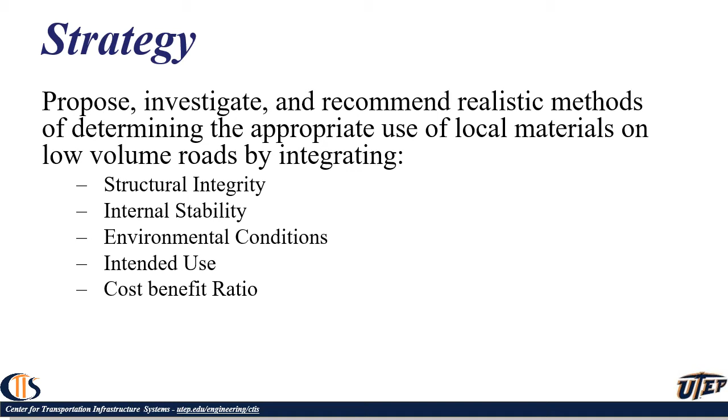The goals of the project were twofold. First, to delineate an out-of-spec material from a low-quality material. I would define these in a second. And if a material was considered out of specifications, we wanted to see whether, when, and how we can use it to still get a quality foundation.

And for the low quality materials, we just wanted to see if we can add a small amount of additives and turn it into a viable material, to behave like a high quality material.

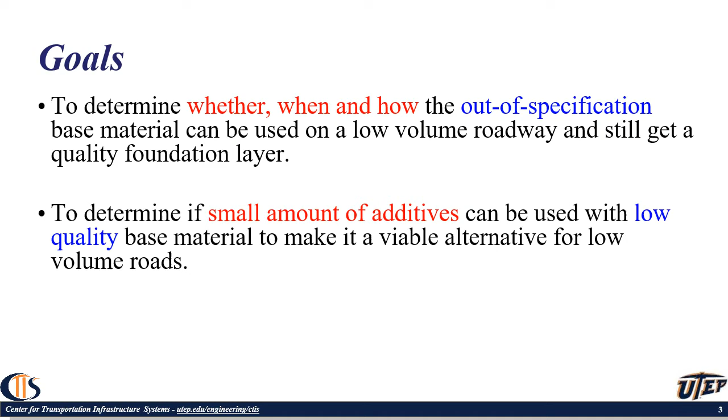Let me first define the difference between an out of specification material versus a low quality material. To do that, I'm showing you an example of a specification I extracted from Texas Department of Transportation, but this same type of specification is very common.

There are two components in this one. One, there are essentially the limits for some index properties given the gradation and plasticity, and the second part has to do with some engineering testing like the strength test, as you see over here.

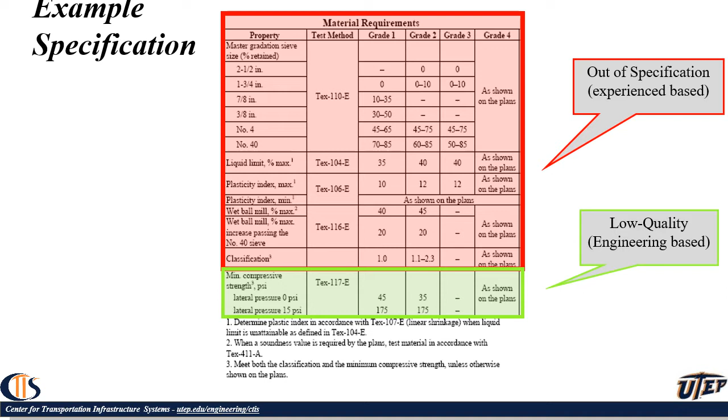What I refer to as out of specification are these index test results, where the limits are set based on consensus and experience, as opposed to the engineering values that were obtained from the parts shown in green.

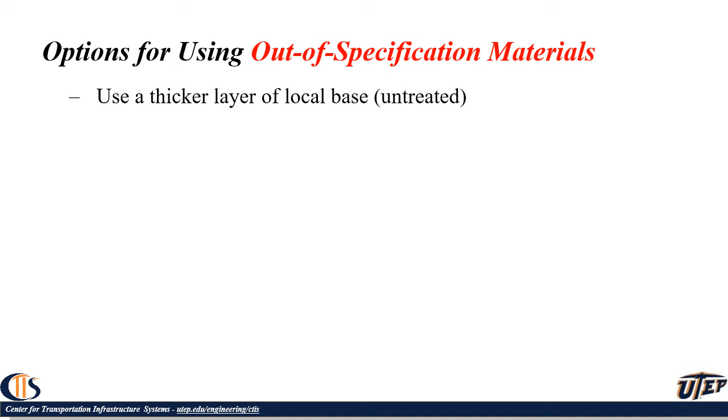The options we used for using out of specification materials are shown below. The first one was using a thicker layer of local base. The second one was to use the same thickness of the local base, but thicken the hot mix asphalt -- we eliminated that because of the cost.

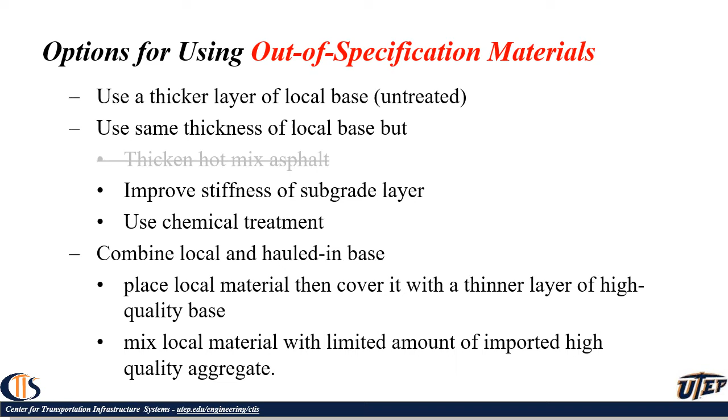Improve the stiffness of the subgrade or use chemical treatment. The other group of options was to combine local and hauled-in base. One was to place a local material, then cover it with a thinner layer of high quality base, and the other one was mixing the low quality material with a limited amount of high quality imported material to improve the properties.

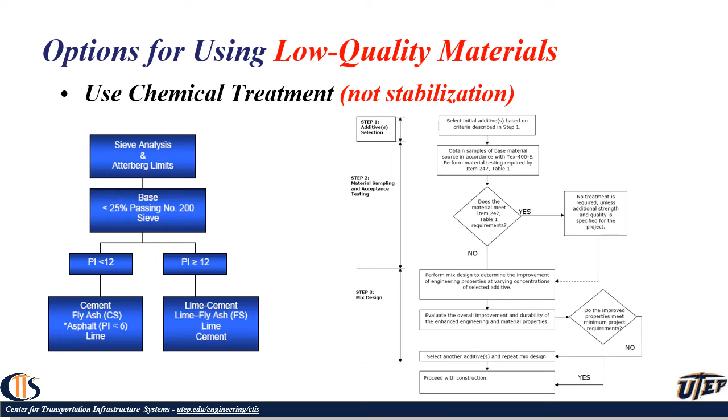For the low quality materials, we primarily considered using chemical treatment. I use treatment differently than stabilization. Treatment, we are talking about 1 or 2% of additives being lime or cement. And depending on the liquid limit and the plastic limit of the material, we would decide what type of stabilizer to use.

Some of the considerations were practicality, how economical the solution is compared to the hauled-in materials that are high quality, and how implementable and constructible the solutions are. There were some engineering considerations as well.

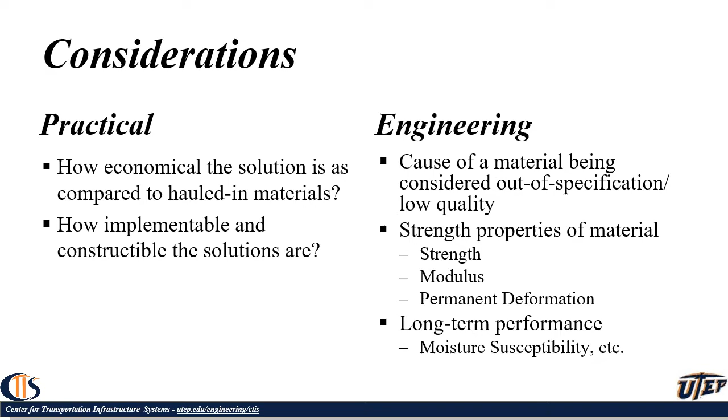Cause of the material being considered out of specification or low quality was important. Strength properties of the materials -- being strength, modulus, permanent deformation -- were considered, and the long-term performance in terms of moisture susceptibility and resiliency were also considered.

This is the materials that we considered, as an example over here. So we considered one material called Cemex, that was all green. It means that it was passing all the specifications for a high quality base in Texas.

And then a group of other materials from different areas, from quarries fairly close to each other, but some of them being considered higher quality than some of them lower quality.

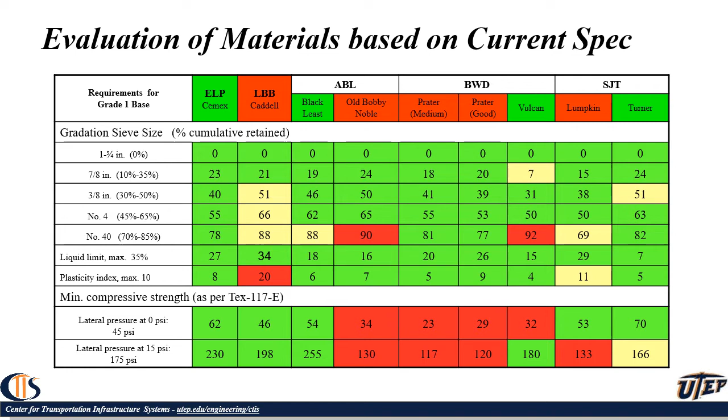And again, you see that the properties, whatever is in red is just failing the specification, and whatever is in yellow is marginally passing or marginally failing the specification. So we have a good mix of different materials that we are considering.

Based on the performance parameters, then we started looking at ranking these materials as well. So they are the same materials that I showed you before.

Instead of the gradation and the plasticity, we started looking at the dielectric constant as an indication of the moisture susceptibility, resilient modulus to get the modulus of the material, permanent deformation, and retained strength. That will be the strength before moisture conditioning and after moisture conditioning, and retained modulus the same way. And the limits are shown over there in the graph.

As you see, in terms of performance, some of the materials are passing, and some of them are not passing the performance. For instance, Turner is basically satisfactory in terms of performance, but it might not be passing all the requirements. But the El Paso one, which is passing all the specifications, has a low resilient modulus for what we consider a high quality base.

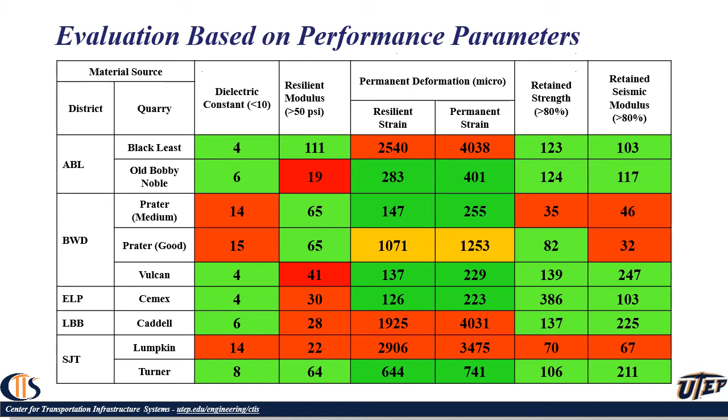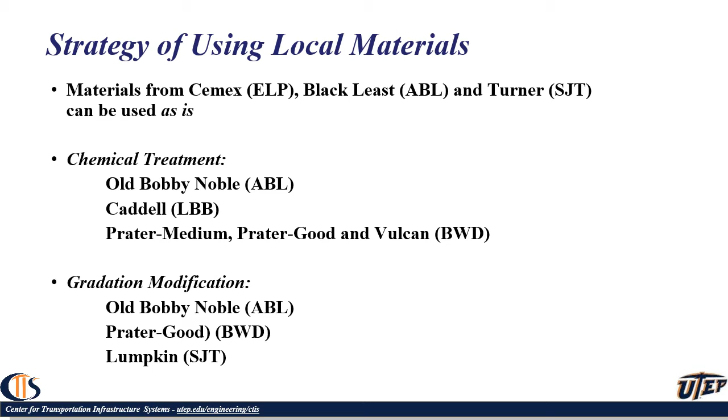So we started looking at chemical treatment for several of the materials, and gradation modifications for some others. Of course, there were three of them that we decided to use as is, because we considered them to be high quality.

Based on the results that we got, I'll just focus on the ones that were low quality, and we started looking at treatment. You see that the first one was not performing in terms of strength and classification. Class 1 means that it's high quality. By adding only 1% cement, we are fulfilling all the requirements, both in terms of strength and classification and the plasticity.

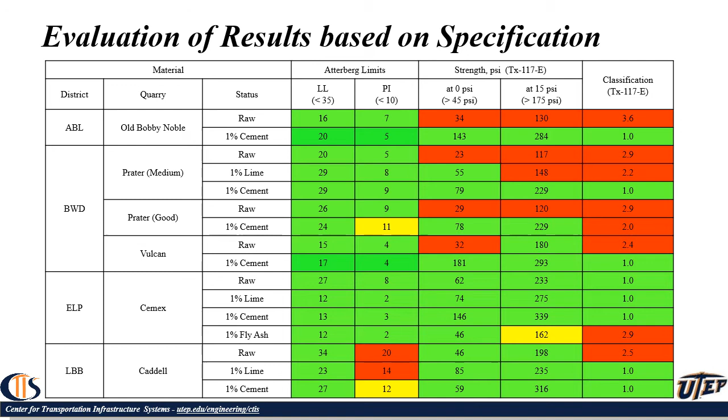The same thing for a different material. For the second material, the lime was not effective, but the cement was. And all you see in common is we are not using more than 1%. In the majority of the materials, we could engineer with 1% additives to pass all the requirements of the specification and be a grade 1, meaning a high quality base.

Then we started looking at the performance of these materials now that they were considered grade 1, and we looked at the values I discussed to show the performance. Even though we were now passing with 1% cement, we are not fulfilling the permanent deformation requirement. So we're going to get a settlement in the base material if you use it, even with 1% cement. So we have to be careful.

But what you see, for instance, the Prater material with 1% cement, we are passing all the requirements, even though we were failing the retained strength and modulus without that 1%. Based on that, again, we can engineer all the materials. For instance, for the Lubbock Caddell quarry, 1% lime works better than 1% cement because of the high plasticity of the material.

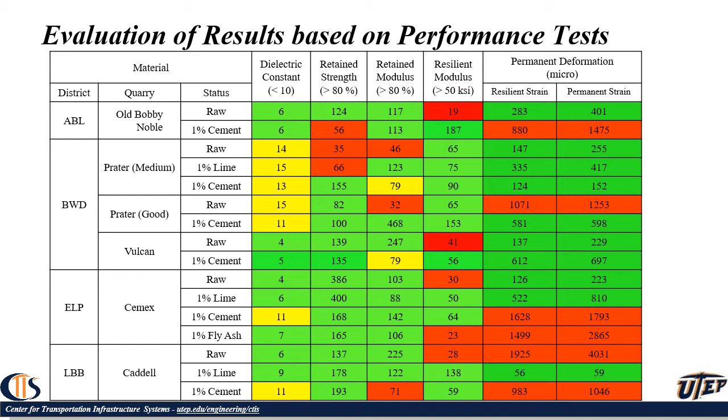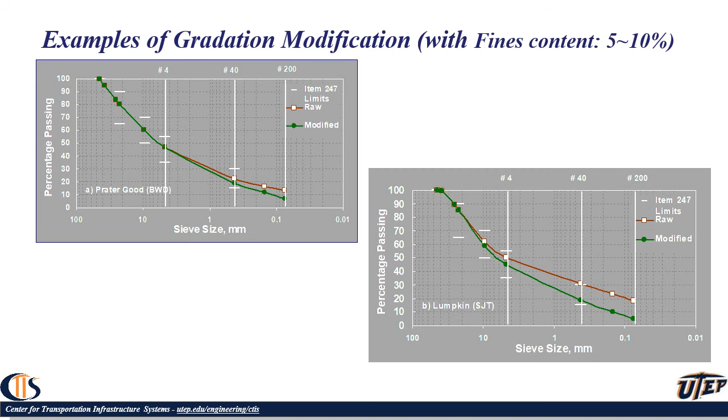As an example of gradation modifications, we started basically removing fines from the materials because of the relaxed values that we had. We found that the gradation needs to be modified significantly more. The change in the gradation by removing fines was only marginally successful.

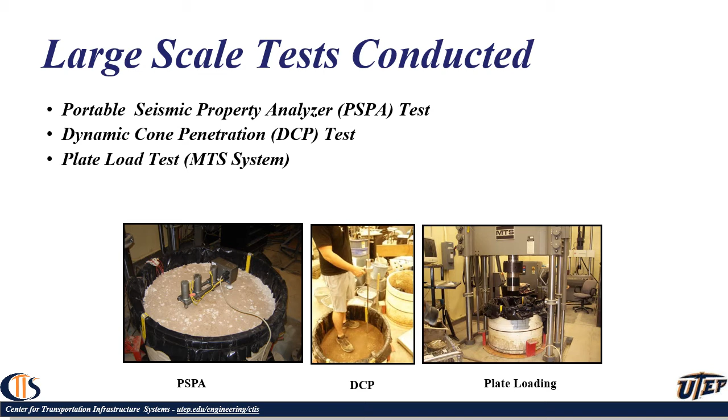The next step, before putting it into the field, was to test it and make sure the material is working. So we made these one meter scale specimens, putting them under an MTS dynamic loading system, and we started applying loads on them. We used seismic testing and dynamic cone penetration to get the strength and modulus of the layer, and then we performed plate load tests under the MTS. This is some of the information that you see.

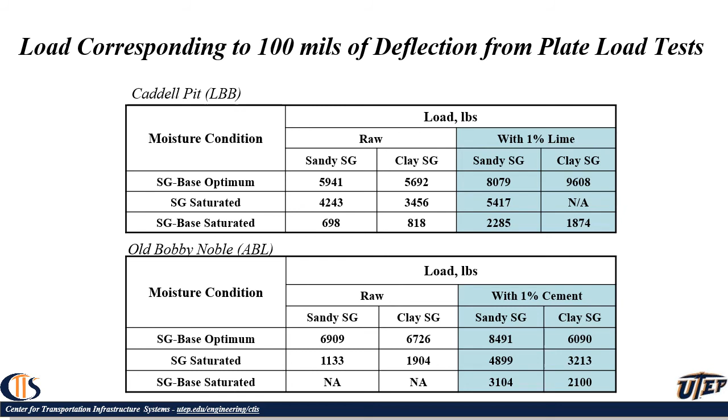We tested each specimen in three conditions: when the subgrade and base were placed at optimum, when the subgrade was saturated, and when both the base and the subgrade were saturated. You see that by adding 1% lime, we can significantly improve the performance of the material for this Caddell pit. And the same thing with 1% cement for the Abilene material, as you see over here.

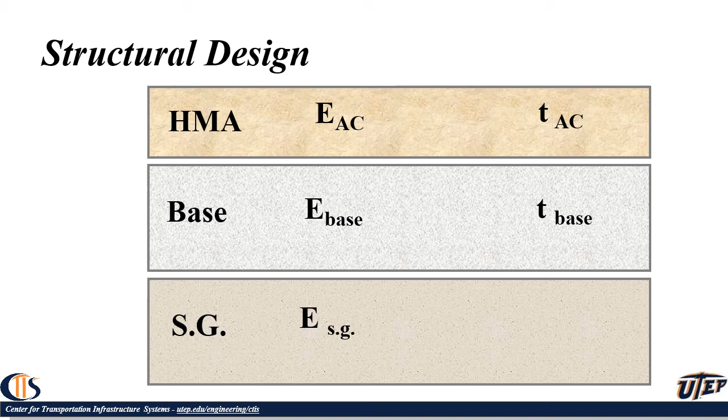The next step to consider was looking at the structural design. So we decided to see how we can start controlling the rutting and the cracking of the material. Traditionally, cracking has to do with the tensile strain at the bottom of the asphalt, and rutting was the compressive strain at the top of the subgrade, to make sure that the subgrade is not rutting. We were also interested in the rutting of the base. So we started using permanent deformation properties and a VESYS program to look at the permanent deformation of different layers.

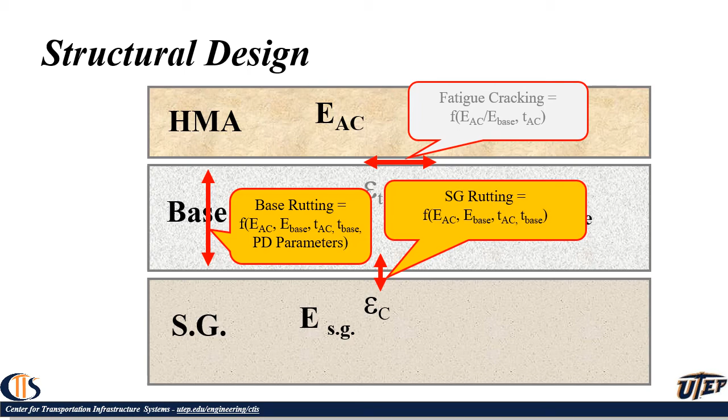One thing we learned very quickly is an unintended consequence of using thicker, lower quality base: if you use empirical designs like the AASHTO 1993, making the base thicker controls the rutting. What I'm showing you here is the same pavement structure, one with a high quality base and the other with a low quality base.

We are looking at the variation of rutting with the thickness of the base, from 4 inches to 20 inches. For the high quality base, the maximum rutting is 1/10 of an inch, while for the low quality base, it's about 2.5 inches of total rutting. For the high quality base, as you increase thickness, total rutting decreases, as you see here.

As you increase the cover with thicker bases, you increase the rutting insignificantly in the base, but significantly decrease the settlement, the rutting in the subgrade. But with a thick, low quality base, as you make it thicker, you substantially increase the rutting of the base layer, even though you significantly decrease the rutting of the subgrade. So you should be careful that a thicker base is not the solution. What we found is that the top 8 to 10 inches of the base dictates the rutting performance of secondary roads.

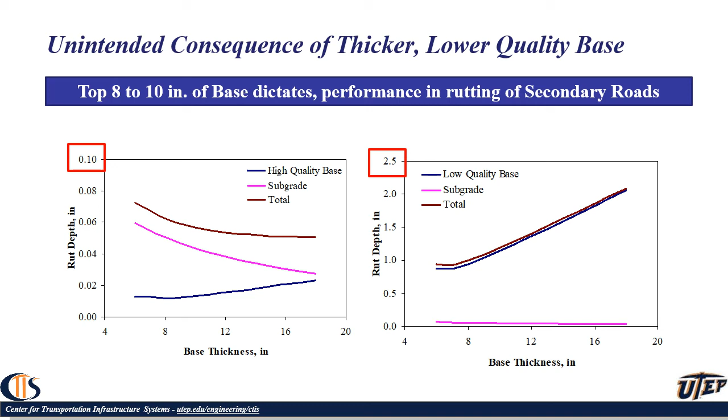The last item is a cost analysis, since we're trying to be economical. There is a critical hauling distance, and to address that we put a worksheet together considering two designs for the equivalent traffic number, one with high quality material, one with local material, factoring in the cost of material, transportation, and the break-even point.

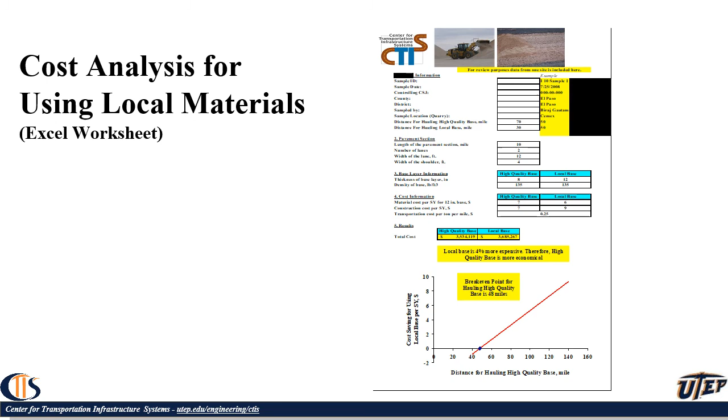For instance, in this example, up to around 50 miles, the cost would be equivalent, and if it's less than 50 miles, you're better off bringing in the high quality material than using local materials, because the local base is significantly worse than the high quality one. So we can do the assessment further.

Based on the lessons learned and the information I've provided, we developed a guideline, and I can give you the highlights in terms of conclusions here. The first one is obvious: depending on transportation, construction, and material costs, the use of local base material can bring considerable cost savings to the project, especially if you can bring in a competitive environment by having several quarries in the vicinity competing on cost.

Use of a small amount, 1 or 2%, of calcium-based additives, either cement or lime, may significantly improve the strength and modulus of low-quality base materials. The goal here is not to stabilize the material, but to improve it so that it becomes comparable to a high-quality granular unbound base. Modification of gradation doesn't seem to bring drastic change to the properties of low-quality base material, but it can provide some improvement for off-specification materials.

The main mode of failure for secondary roads is rutting, and the quality of the top 8 to 10 inches of the base controls this rutting performance. So it's imperative to have high quality or improved material in the top 8 to 10 inches. For high quality or treated base materials, increasing base thickness will reduce pavement rutting, as we always consider in design. But for low quality untreated base, increasing thickness basically transfers and promotes rutting of the base layer.